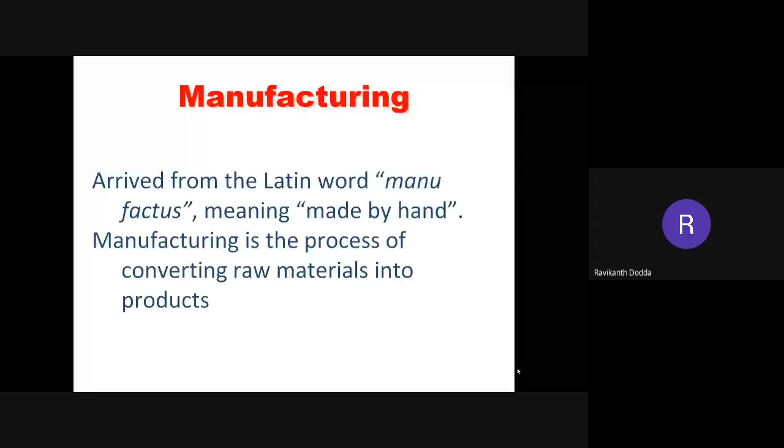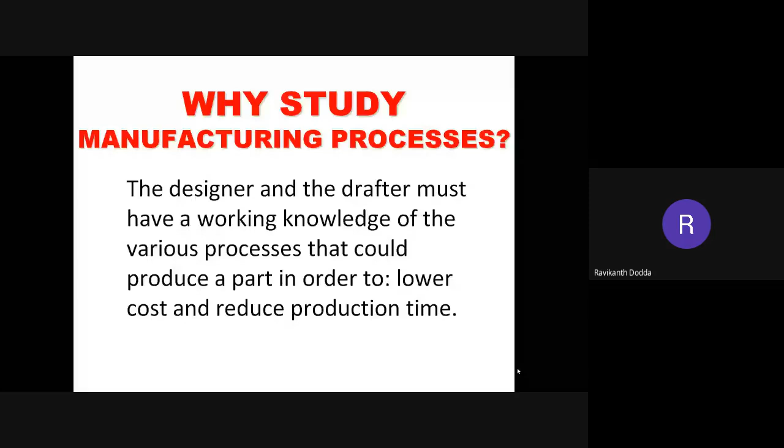So now, as I told you, there are many manufacturing processes. Casting is also a process. What are we doing in casting? Casting is a process where we make a pattern with some suitable material, then molten metal is allowed to solidify, and the rough casting is ready for the machine shop. How is it done initially?

The rough casting is now ready for the machine shop. Holes are then bored and reamed. Top and bottom surfaces are machined. Smaller holes are drilled and counterbored. All these are secondary operations. So initially making the rough casting is a primary process, and machining to get the desired shape is a secondary process.

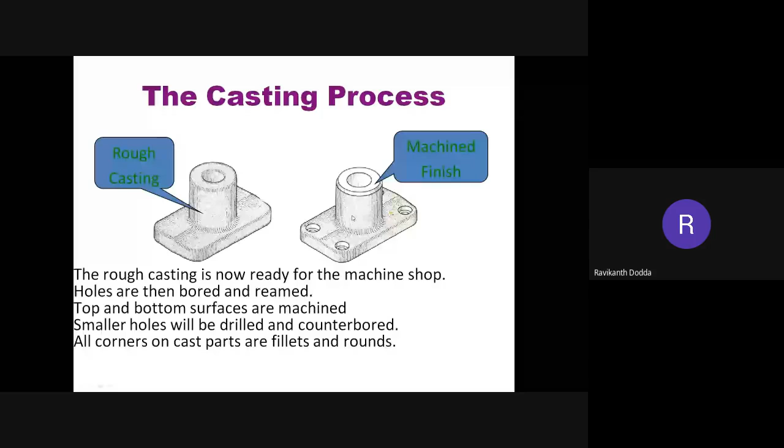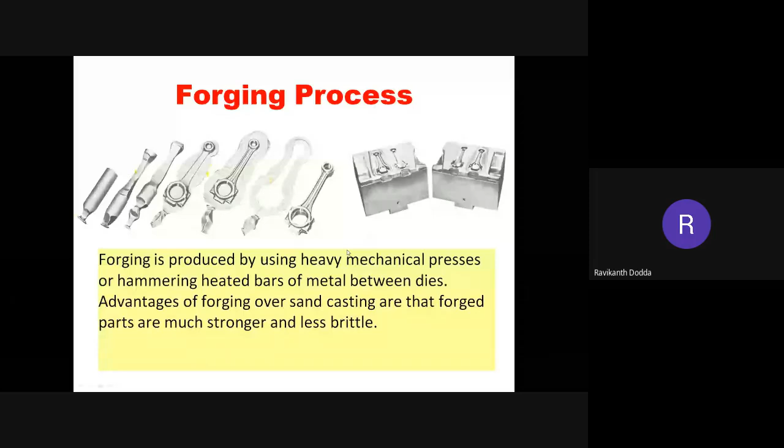Similarly, in forging also, we have primary forging operations, then we convert it into the desired product. Forging is also a primary manufacturing process. Then welding; this is similar, and it is also called a primary manufacturing process.

And what materials can we use? We may use metals. Recently, plastics have come into existence, and we have inorganic materials also. They play a vital role nowadays. Even fiber reinforced plastics are replacing entire concrete structures. Very light in weight, and used to construct undersea bridges.

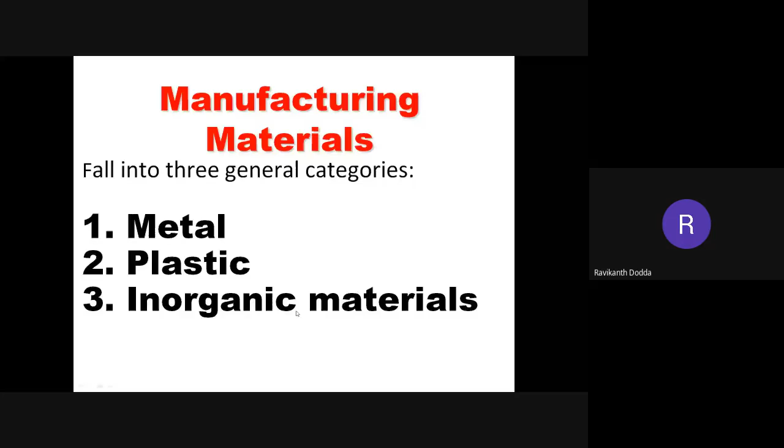There are many more things that come under this tremendous field of manufacturing processes. Materials are classified as ferrous and non-ferrous alloys, and those are not necessary here. And carbon, ceramics, heat treating, annealing, all those things.

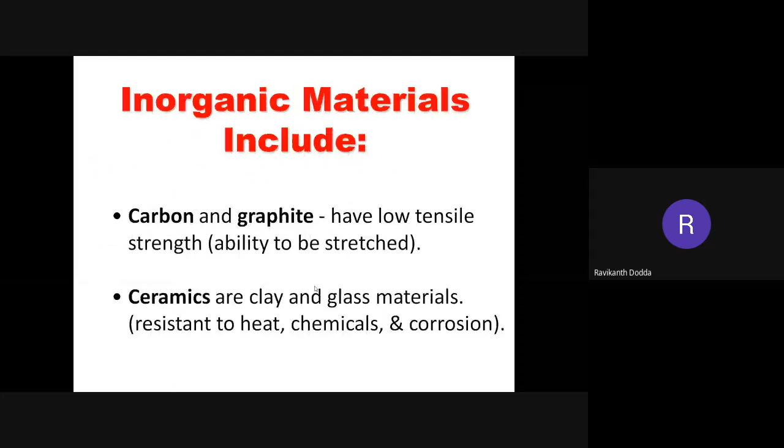And here we can come to this. Plastics are divided into two: thermoplastics and thermosetting plastics. Thermosetting plastics become permanently hard once subjected to heat; they cannot regain their shape and size, and you cannot even remold them. But thermoplastics we can reuse again and again. So most plastics are thermoplastics, and nowadays thermosettings also have their importance in many industries.

Now, the typical plastic processing operations include extrusion, blow molding, injection molding, and thermoforming. Extrusion is nothing but a toothpaste analogy. What we are doing is we are giving pressure with a ram at the outside. In extrusion, we take a billet material, and we get whatever shape is required with the die. Through blow molding, we can make plastic bottles, and injection molding is also playing a vital role. We can make different types of products through injection molding of plastics by changing the pigments.

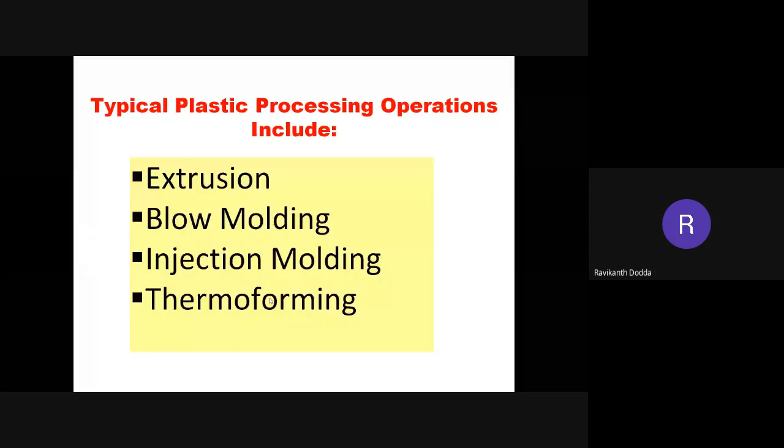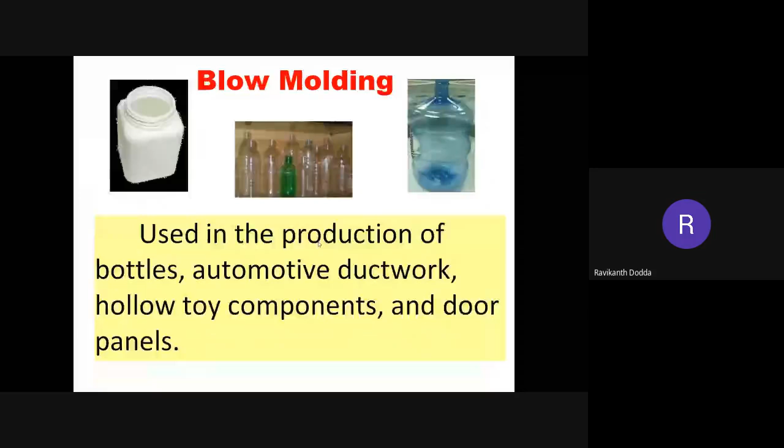So my intention is to come here for this basic workshop. If we take KSRM College of Engineering, we are having some bitter experiences with the first year students. This workshop practice is already completed by the students of computer science and mechanical engineering. But even after completion, they could produce the product, but they don't know what tools are required, what the purpose of each tool is, and which tool will be useful for them. So in order to gain good basic knowledge in manufacturing processes, a student entering the first year of an engineering degree should undergo a course on workshop practice.

It is essential. In order to have a balanced overall development of budding engineers, it is necessary to integrate theory with practice. General workshop practices are included in the curriculum in order to provide hands-on experience. This is most vital for the use of different engineering materials, tools, equipment, and processes that are common in the engineering field.

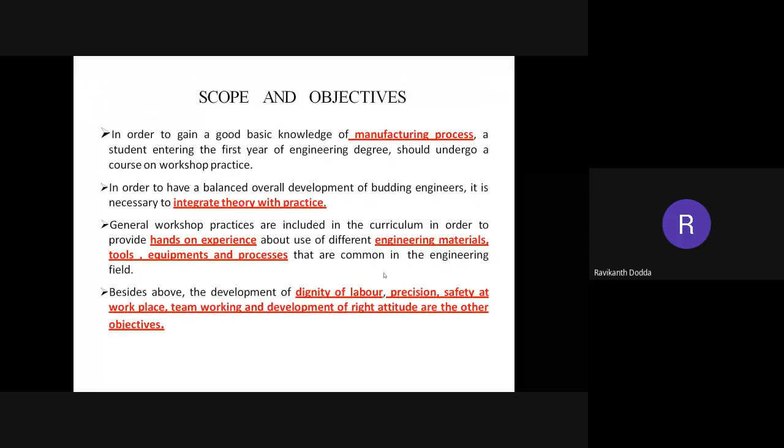So, why I am intending to make this session only for first year is that they are very poor, and I'm very sorry if I'm going in another direction, but people are unable to know the tools and their purpose and uses, even after completing their entire workshop by spending hours together. Besides the above, the development of dignity of labor, precision, safety at the workplace, team working, and development of the right attitude are also very important.

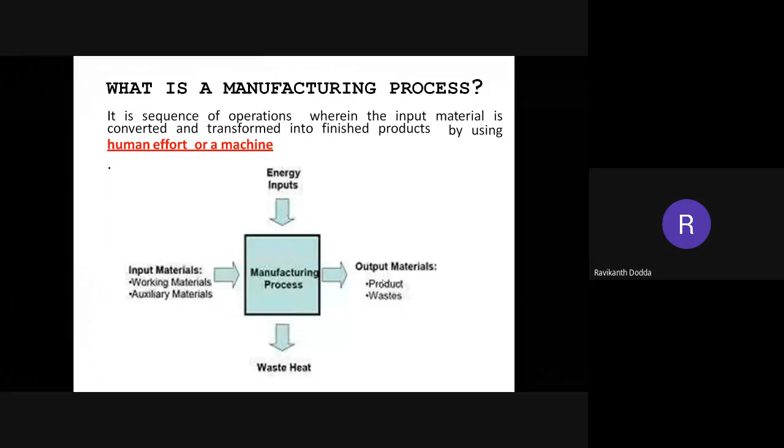So we are coming now. We are giving some energy, we are taking the input material, and some heat is of course liberated. In case of carpentry, it may not happen, but in some other machining processes heat may be evolved, and then we get the output material. Workshop practice gives the basic working knowledge required for the production of various engineering products. This you should keep in mind. The application of different working tools, equipment, and machines, as well as the technique of manufacturing a product from its raw material, is to be known.

For example, if you are making a mortise and tenon joint, a lap joint, or a butt joint, what is the purpose? Why is it necessary? What tools are required? What material are you going to use? All these things are very important from the subject point of view.

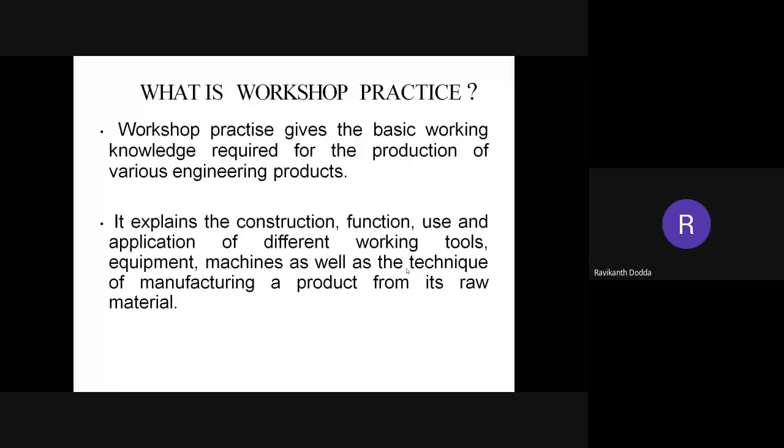And in any engineering college, we have different types of workshop practices. Particularly, we have carpentry, fitting shop, and electrical shop. Similarly, we have sheet metal shop, welding shop, and different workshop practices.

Coming to carpentry, what is carpentry? It deals with the processing of wood to obtain the desired shape and sizes. Okay, and what are the tools here? We have tools for marking, gauges, for measuring purposes, and for cutting purposes. We have cutting tools, boring tools, and for striking, we have different types of hammers.

For holding, similarly, we have some different types of equipment. Similarly, we have a fitting shop where we can do work. So what is the main intention in fitting shop? We have different types of chisels. We have different types of files. We are finishing this product.

It is the process of assembling various parts manufactured in the machine. For example, if it is a rough surface, we are filing it. Okay, so these operations are usually performed in fitting shop. We can have holding tools, cutting tools, striking tools.

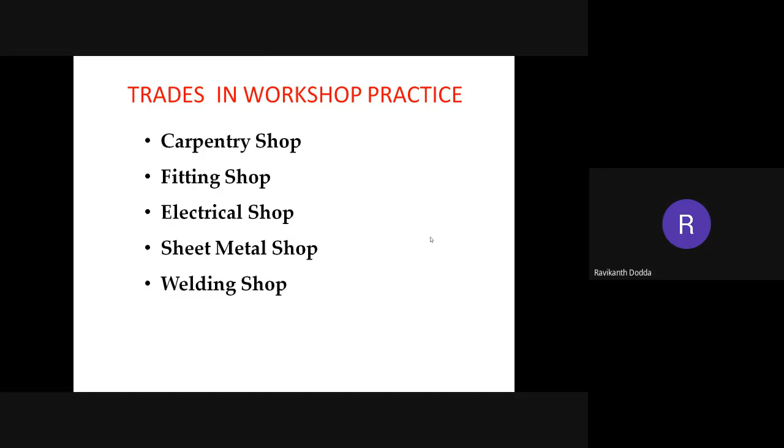Next, we are coming to this. Carpentry may be defined as the process of making wooden articles and components such as roofs, floors, partitions, doors, windows. It starts from the marketable wood and ends with a finished product. It deals with building work, furniture, cabinets, and of course these things are known to you. And these are the joints which I'm highlighting. A student has to study commonly used carpentry joints such as lap joint, dovetail joint, mortise and tenon joint, maybe a T joint.

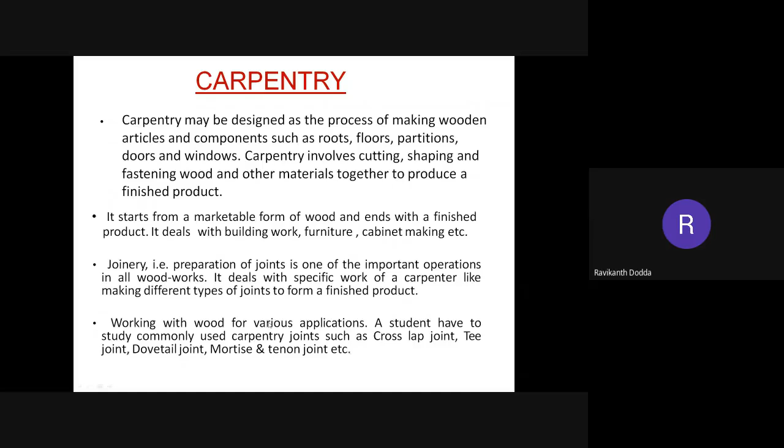And what are the tools which are required? I'm purposefully asking you to make this. Why are we using a steel rule? A steel rule is a direct measuring instrument. It is made of stainless steel, of course, and the edges are accurately ground, and it may be 150 to 600 mm, and the accuracy is 0.5 mm. And the steel rule is the most useful tool in carpentry.

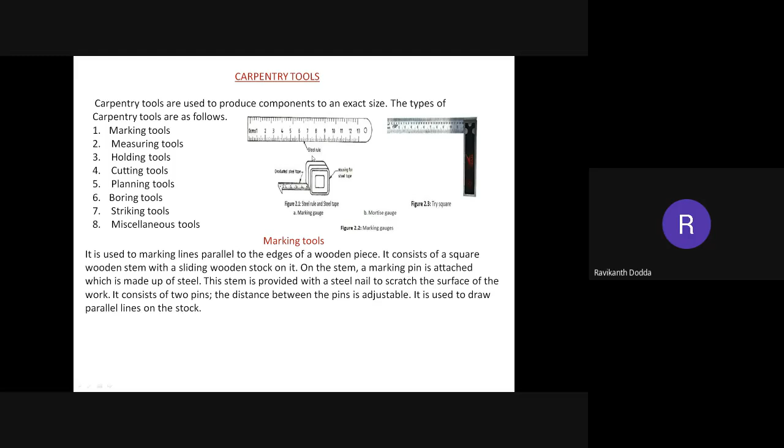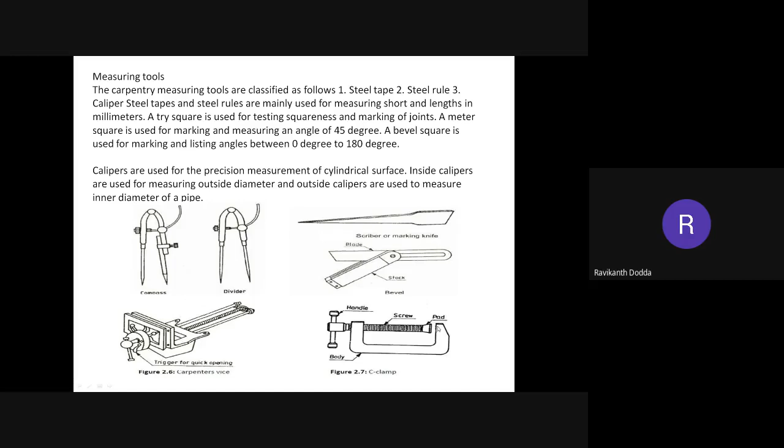And second, we are taking the try square. If you want to test the flatness of a surface, a measurement will be parallel, or it may be at an angle like that. You can make the measurements with the try square here. Similarly, we can have other tools like this carpenter vise, where one jaw is fixed. Similarly, there will be a scriber for marking, and a divider for making different measurements. Similarly, there will be a C clamp to hold the workpiece firmly.

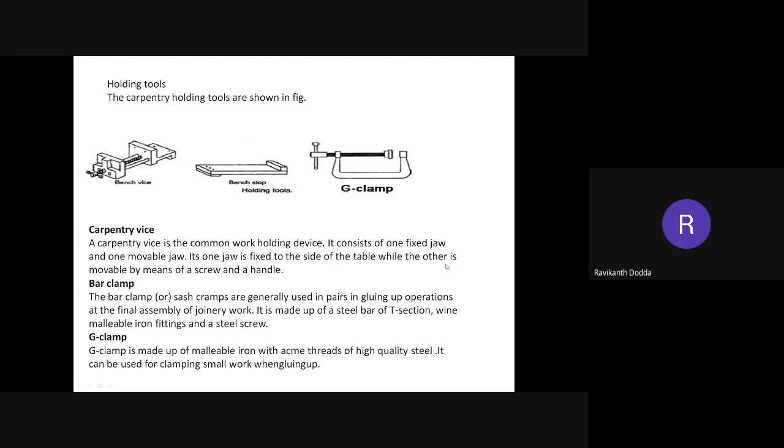And the most widely used workshop tool here is the bench vise. In this case it is also called a carpenter vise. It consists of one fixed jaw and one movable jaw, as I told you. One jaw is fixed to the side of the table, while the other is movable by means of a screw or spindle.

Then coming to different types of saws, this is most important. Many of you will be confused with different types of saws. These are called hand saws. Apart from this, there are power saws also. Power means using a machine. But here in the hand saw, you have different types like rip saw, cross cut saw, and many other types: panel saw, tenon saw.

This is the rip saw. The blade of the rip saw is made at an angle of 60 degrees. This is most important. For cutting very hard wood, we can use the rip saw. For making smooth panels, we may go for either panel or tenon saw. And there will be a cross cut saw, which is at an angle of 40-45 degrees, and its teeth have less set than the rip saw. For cross cutting, hold the saw at about 45 degrees. And mostly this saw is useful for medium rough purposes.

Okay, so apart from that, there are different types of chisels. One is called the firmer chisel, the other one is called the paring chisel, and then there is another chisel known as the carpenter's mortise chisel. Okay, so this is called the frame. Here we call it the tang, and this may be the neck and ferrule, and of course the blade. The firmer chisel is capable of doing heavy work.

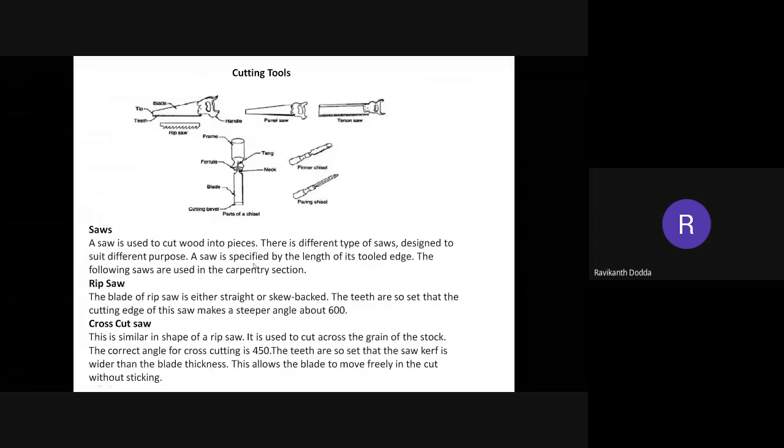And of course, you need to have a plane, a jack plane. We call it a jack plane. It consists of a body, a cutting blade, a handle, and a knob. So here we have the stock or blade. You hold this, and this is a wooden jack plane.

And of course, we can have a metal jack plane also, and for smoothing purposes, a smoothing plane. But the wooden jack plane, metal jack plane and smoothing plane are most useful for carpentry. The jack plane is the most commonly used. The angle of the cutting blade is around 45 degrees, and the blade assembly is inserted into the plane along with the wedge. The back iron supports the cutting edge and also breaks the shavings.

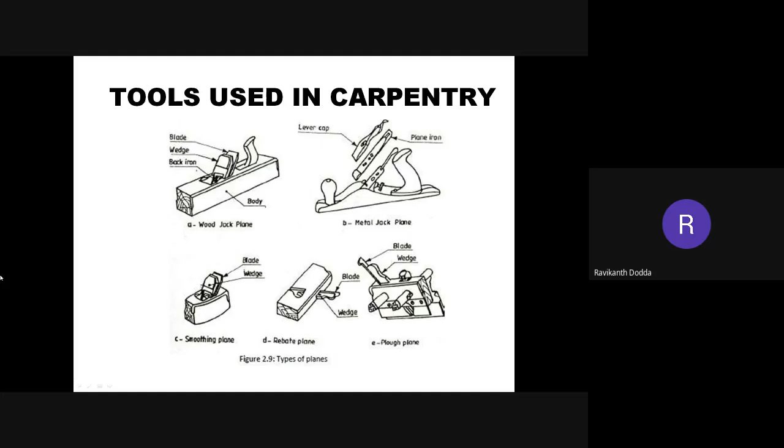Of course, some safety precautions are also required in carpentry. Tools that are not being used should always be kept in their proper places. That means on each and every table there will be a slot to keep the tools. Make sure that your hands are not in front of sharp edges. Use only sharp tools. A dull tool requires excessive pressure and more stamina. Wooden pieces with nails should never be allowed to remain on the floor.

Be careful when you are using your thumb as a guide in cross cutting. Test the sharpness of the cutting edge of the chisel on wood or paper. Never chisel towards any part of the body. Do not use a saw with a loose handle. Always use a triangular file for sharpening the teeth. Do not use a saw on metallic substances. Do not use a mallet to strike nails. These are some of the do's and don'ts which are required in the carpentry shop.

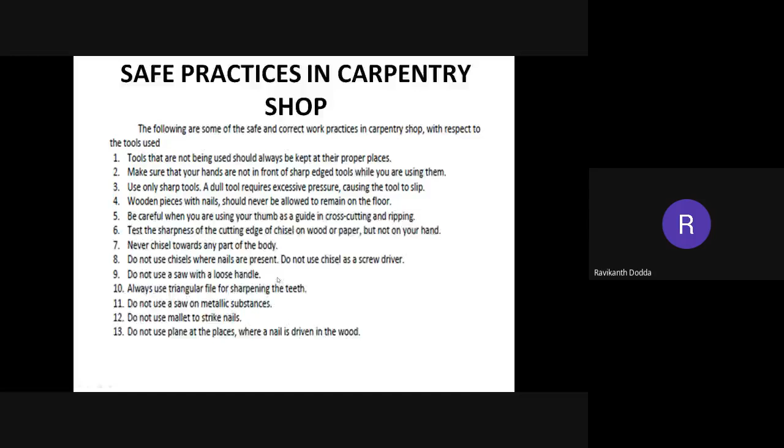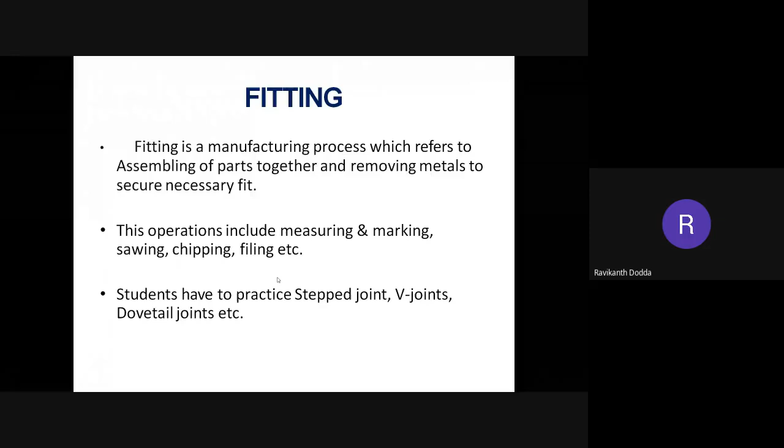Then coming to fitting, which refers to assembling parts together and removing metal, as I already told you. Here we have different types of joints like square, V joint, stepped joint, and dovetail joint. These are the things we make, and here we have the bench vise. This is a common tool for holding jobs. It is made of cast iron, and this is called the spindle, and there is a screw here. It also has two jaws. One is fixed, the other is movable, and these are called grippers. These have rough surfaces.

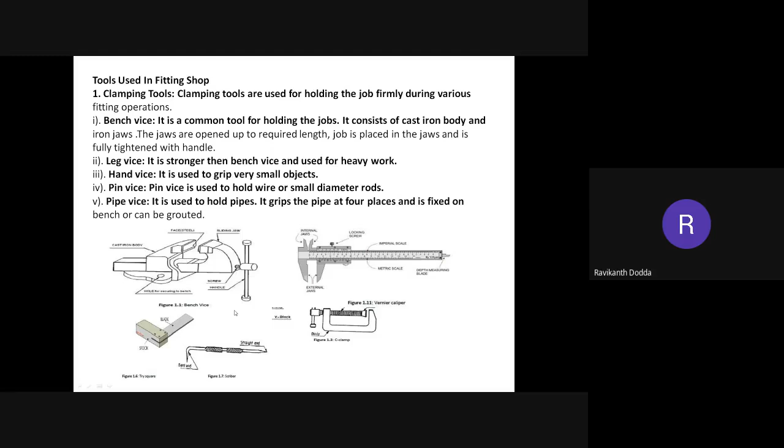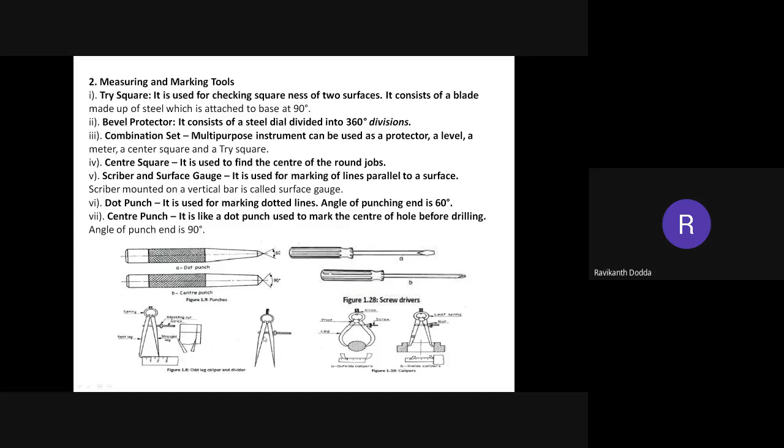Then we have leg vise, hand vise, pin vise. Of course, these are known. And for measuring, we use calipers here. And the try square we also use here for checking squareness. For punches, we use dot punches of 60 degrees and 90 degrees. For measuring, we use inside calipers and outside calipers. Calipers are also used in the fitting shop, and you need to know about these things. To measure up to 0.01 mm, we use a vernier caliper. These are some of the instruments that we require here.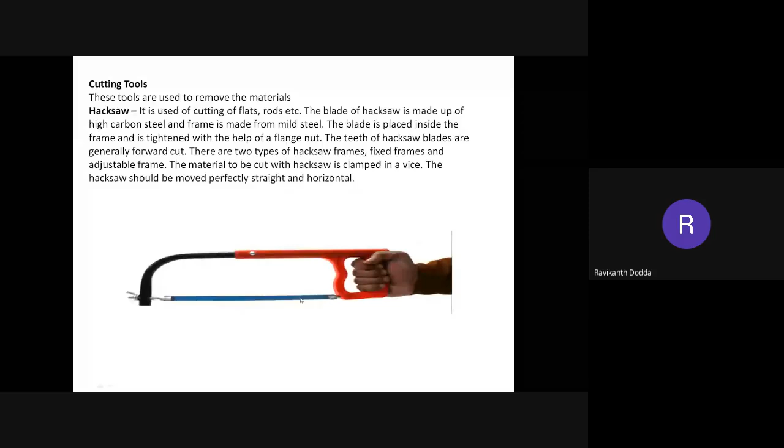And then files: we have flat file, semicircular file, triangular file, square file, circular file, depending upon the type of uses. For rough, 20 teeth per inch. For bastard, it's more, 30 teeth per inch. Second cut, 40 teeth. Smooth, 50 to 60 teeth. Dead smooth, 100 teeth per inch. So as the teeth per inch increases, the smoothness also increases. Rough and bastard files are used for rough cutting. Smooth and dead smooth files are used for finishing work.

The file should be used in a perfect horizontal position. Pressure should be applied on the forward stroke only, not on the backward stroke. Some of the people will do like this. They go on moving front and back in the same scenario. But if you do like that, instead of the intended direction, you'll cut it in another way, and again you are going to waste some pieces. So that is going to happen in the workshop. So these are some of the things which you need to know in case of fitting.

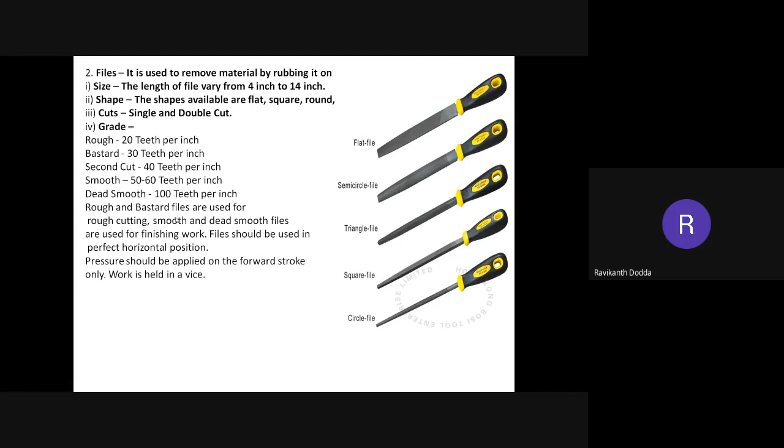And of course, in the chisels, I told you diamond pointed, flat, half round, cross cut chisels. These are some of the chisels which are required. So just now I'm talking, this is the adjustable frame. This is the fixed frame. And of course, in hammers, we'll have ball peen hammer, cross peen hammer, straight peen hammer, and even sledgehammer. So that is also required here.

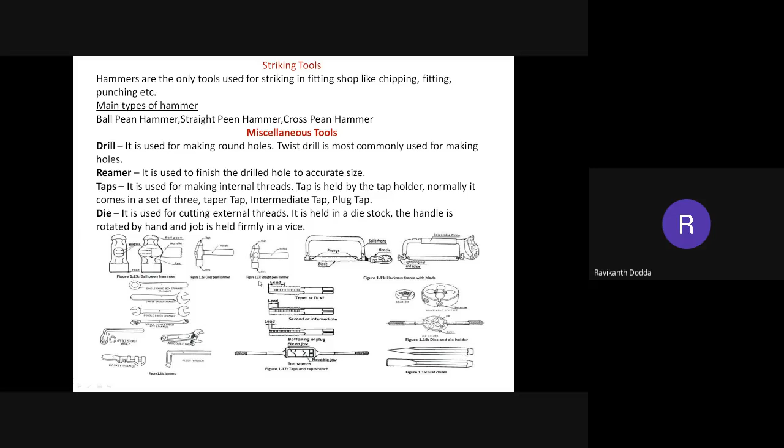And the safety precautions: you have to keep your hand tools wiped clean and free of dirt, oil, and grease. Dry tools are safer to use. Do not carry sharp tools in pockets. Wear leather shoes and not sandals. Consistently we are saying this. Don't wear loose clothes, and definitely you need an apron, or at least you must have some thick clothes, khaki pant and khaki shirt, very thick. Do not keep working tools at the edge of the table.

Apply force only on the forward cutting stroke and relieve the force on the return stroke while sawing and filing. This is the most important precaution that you have to keep in mind. Do not hold the workpiece in hand while cutting. Use the file with a properly fitted tight handle. After filing, remove the burrs from the edges of the work to prevent cuts to the fingers.

And do not use the vise as an anvil. Some people will keep on hammering by keeping it on the vise itself. It is not a good practice, because a vise is fitted to a table where it may get damaged. Like that, you need to have a separate anvil. An anvil is there to make different types of blows with the hammer. So you should not do it on the vise. Most of the people will commit such types of mistakes, and you must be aware of other things also.

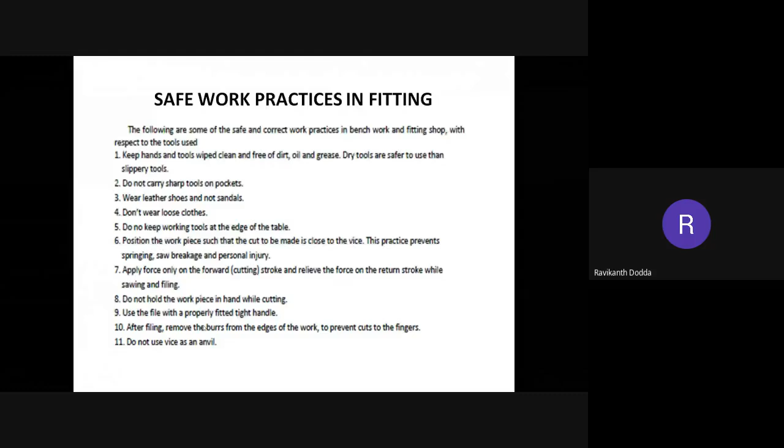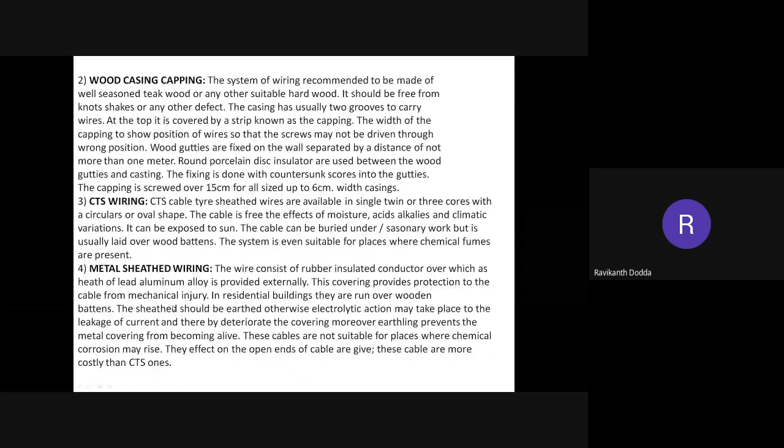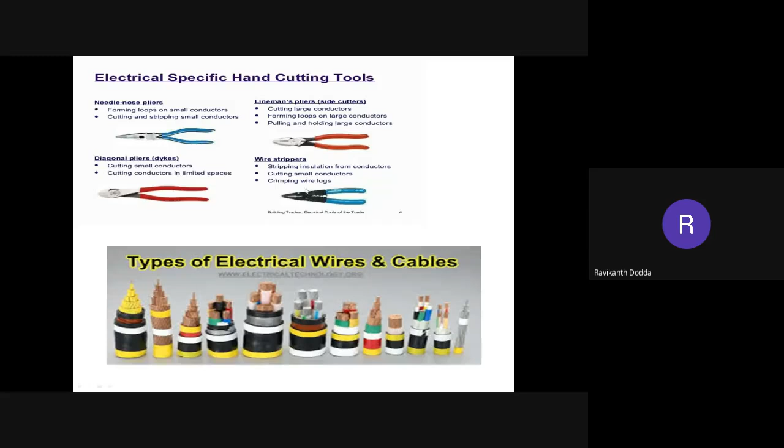Next, house wiring, as this is most important. Capping may be CTS wire, cab tyre sheathed wire. This is the wiring that we use, and with this also we can do many types of jobs. And here you need to know the difference between a cutting plier and a nose plier, and what is side cutters and wire strippers. This is for the purpose of cutting. This is the needle nose plier: forming loops, cutting and stripping small conductors, pulling and holding large conductors, crimping wire lugs. So these are four different ones, and we have to identify all those things.

And the general procedure of sheet metal. As I already told you, we are producing many types of sheet metal jobs. But as I know, nobody finds a fluid tight joint. When I asked you to make a square tray, it is intended to make a square tray with a liquid tight joint. That means, of course, you need to weld even after completion of this, maybe some soft soldering, but nobody is doing it. Simply they are cutting, they are folding, and they are throwing it away, and asking to get marks. But it is not like that. So you have to purposefully do that job.

So why is it given a square tray? What is the purpose of the square tray? Some materials are to be kept. Even if you keep some sand or solid materials, it should not flow away. And if you are asked to make a funnel, that will be in a different shape. So you need to keep some concentration here. That's what I'm saying. There will be a feeler gauge to measure the thickness always.

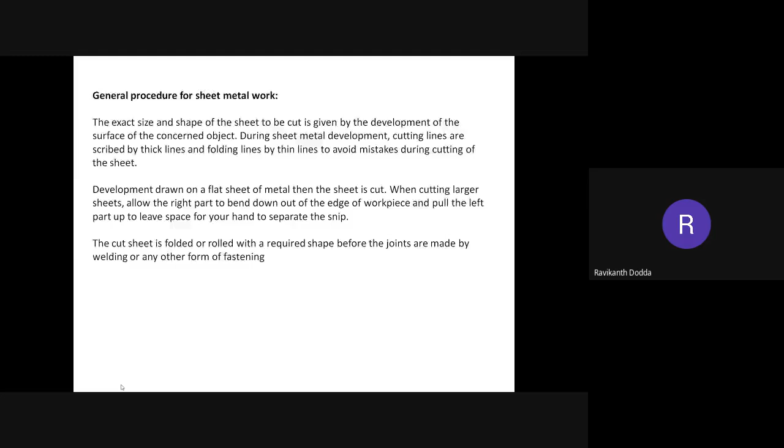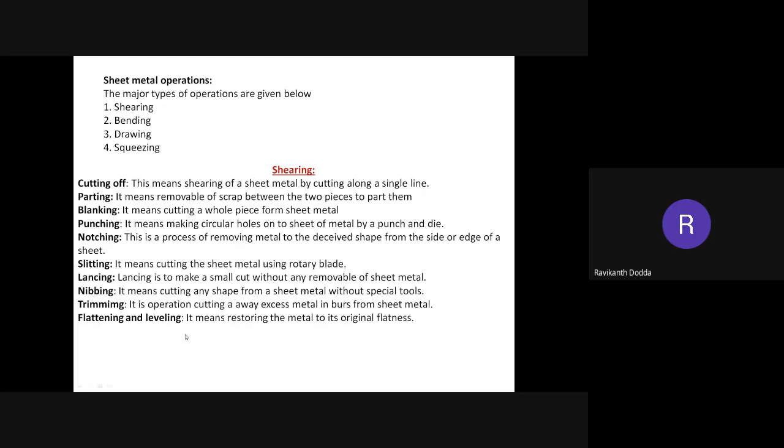Deep drawing, squeezing, and that comes in the higher level. Anyway, we'll discuss that, you know about all these things. Bending means the metal is stressed beyond the elastic limit.

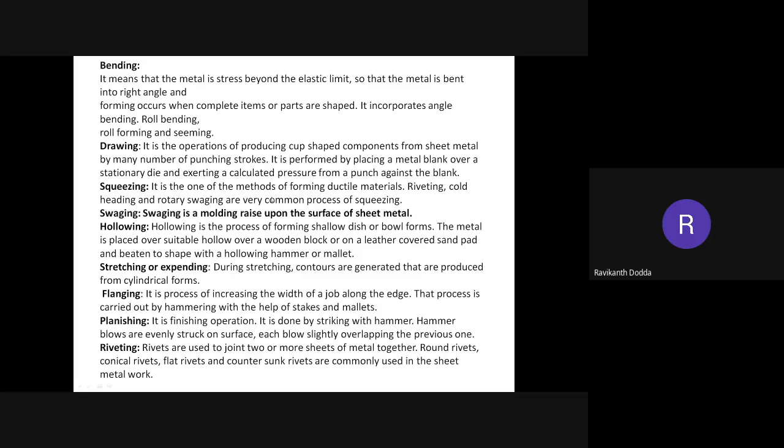Drawing is the operation of producing cup shaped products. This squeezing operation, we are making forming metal. So hollowing, stretching, and all those things are not required.

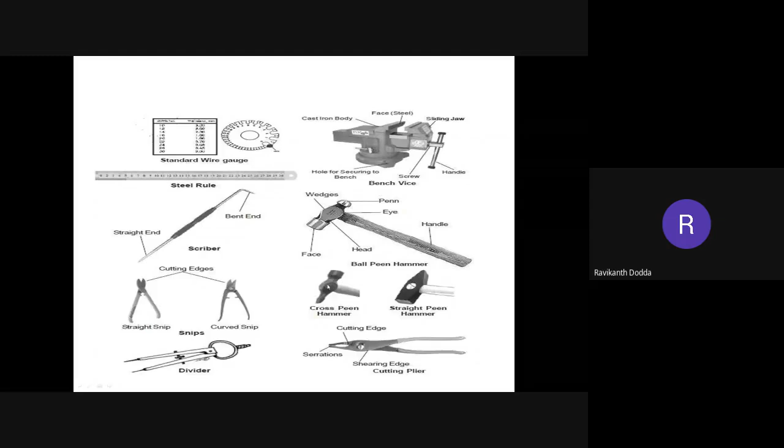So the tools used: most of these tools you are using is a steel rule, and of course a tri square, and some punches you are using. Vice is also required; we are going to keep two vices.

A bend snip is also required for you. Here it is not shown. With a bend snip you can make edges, and you can cut even the sheet metal also. So that is most important.

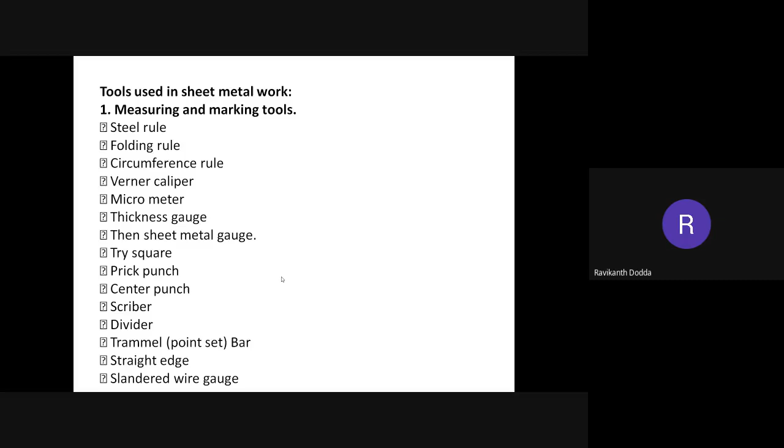Then coming to welding: it is the process of joining similar or dissimilar metals by the application of heat, with or without applying pressure, or without addition of filler metal. In such a way we can go for joining with the different characteristics of the metal.

So why electric arc welding? Arc welding is the process in which heat is generated by an electric arc striking between the electrode and the workpiece. Electric arc is a luminous electric discharge between two electrodes used to join.

So here there will be a welding machine, usually we'll call it a transformer. This is nothing but what controls the voltage. One terminal is connected to the workpiece, and the other terminal is connected to the electrode. Here also there are two things which we might know.

When it is connected as DC RP, direct current reverse polarity - DC means here if you are not using AC current, we may use even DC current. So in that case, the polarity is very, very important.

And what is the type of metal that we are using, and what is the type of electrode which we are using, and what is the process that we are selecting. For example, if you are taking a metal which is of low melting point and an electrode which is non-consumable...

What is going to happen is if we connect electrode negative and workpiece positive, that is called straight polarity, and you can perform it in the usual way.

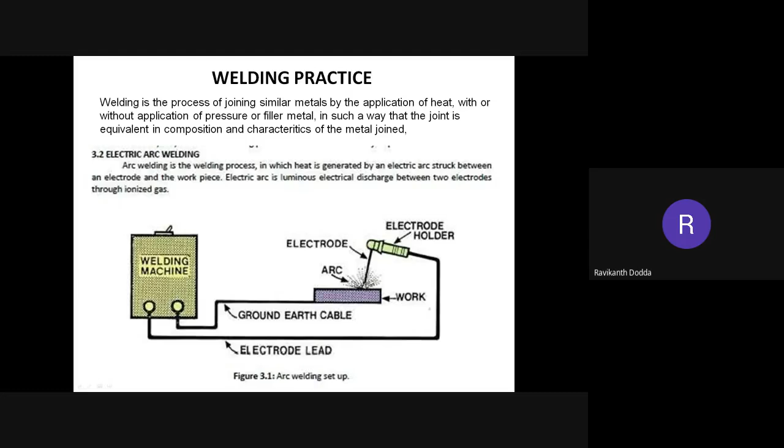So it always depends upon the type of metal and the electrode. This is the case of direct current - DC RP or DC SP - but in case of AC, because of this alternating current, either you can use workpiece positive or negative; that won't differ much.

And what are the type of joints which we can use? We can use butt joint, corner joint, T joint, lap joint, edge joints, and all these types of joints that we can use here.

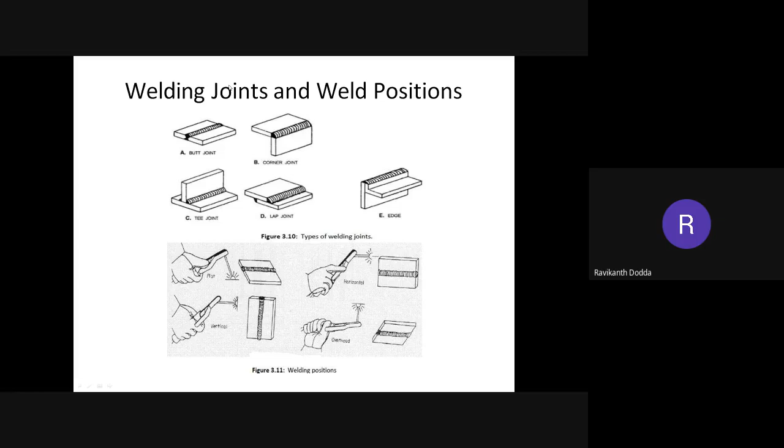And in our shop in KSRM Engineering College, in our welding shop, we are making only two: one is corner joint, maybe a T joint. We are not asking to do much more than this.

Of course, there are some safety practices even in welding. Do not weld around combustible or inflammable materials where sparks may cause a fire, or never weld containers that have been used for storing gasoline, oil, or similar materials. Check the welding machine to make sure that it is properly grounded, and that its leads are proper. Never look at the arc with the naked eye.

Always use goggles or a protective shield. The arc can burn your eyes because of infrared rays coming through, and it will be very harmful. Prevent welding cables from coming into contact with hot metal, water, oil, or grease.

Avoid such contact. Ensure proper insulation to the cables and check for openings. Always wear safety hand gloves. Always turn off the machine when leaving the work. Apply eye drops after welding is over for the day to relieve eye strain if it happened to you.

While welding, stand on dry footing and keep the body insulated from the electrode, and also from any other parts of the electrode holder.

Apart from this, we also have gas welding, which is not included in first year, so I have not highlighted it. There are three types of gas welding. Mostly we prefer oxygen and acetylene as gases, with which we can produce more heat. The heat can be liberated and welding can be done properly, but that part I have not taken into consideration.

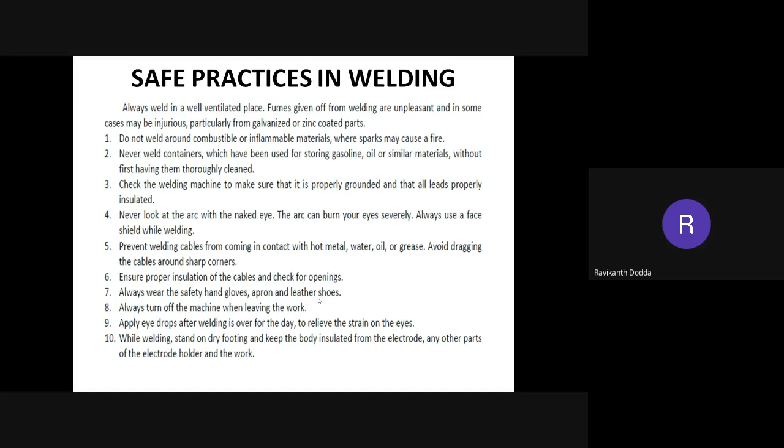So, like that, we need to know. Similarly, which type of welding is preferable depends upon the type of material we are using. For example, take a bike. In a bike, all types of welding are there: soldering, arc welding, gas welding, all types. But which welding is preferable and where, that is to be known. When you know the application, the purpose of the basic workshop becomes very clear. That's why I have taken this part.

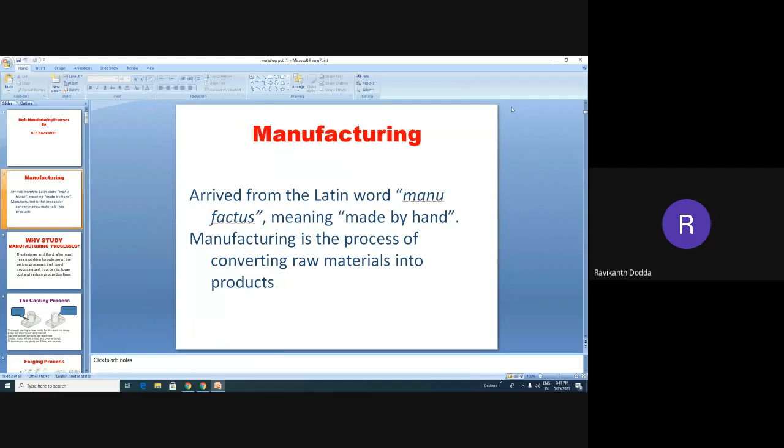My intention is to give this for the students of first year. Our people are not giving the purpose of the tools and their uses, and because of that I have taken this topic, and it will be useful for their Viva examination also, since they are not opening their mouths otherwise. Even for the students of electrical, electronics, and civil, who are coming to the next semester, they too should know about all these things, and what type of wood they are using, whether mahogany, neem, sheesham, teak wood, or something like that. So for this I have taken this topic for first year basic workshop.